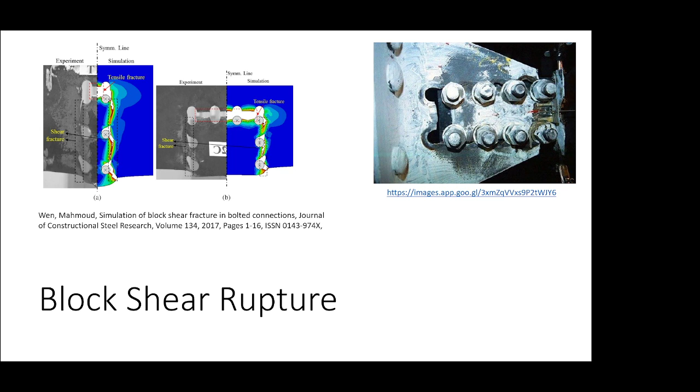What happens in block shear, and the most important thing to keep in mind, is that it's a combination of a shear failure path - one or more shear failure paths - and a tensile path. We call it block shear because what it looks like in the end is this block or wedge of steel tearing out of the member. We're going to talk about how to identify potential block shear failure paths. For this problem, I'll propose there are two failure paths, and there are reasons why you'd check one versus the other. I'll go ahead and tell you for this problem, I don't think that's the path that would govern.

Given the dimensions, although dimensions would probably affect that. And if you ever have multiple failure paths, you just use the one that has the lowest capacity.

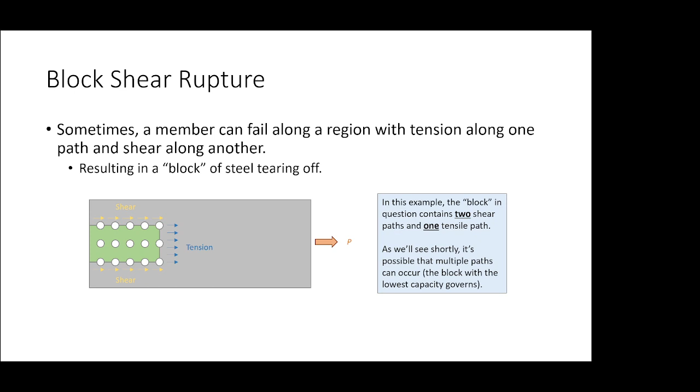All right, let's talk about the math. Now I want everybody to turn to this page in the manual because this equation looks weird. It's on 16.1-138. It's a weird equation because I want everybody to kind of see it. There are a few expressions in the spec that look like this.

So this is on page 16.1-138, and this is the expression for block shear. So the nominal capacity is determined. Am I on the right page, 16.1-138? I think you're on 16.1-38.

Did everybody see it? I think it's on the bottom, or is it on the top? No, it's on the top. It's on the top on the left side.

So first off, the expression or limit state is formatted similar to how others are formatted. We have a nominal resistance, and then we have a LRFD resistance factor and an ASD safety factor. So our LRFD phi value is 0.75. But then we got this, what's this hullabaloo going on right here?

We've got the nominal capacity equals a pile of junk less than or equal to another pile of junk. And all that is the spec's way of saying that it's the minimum of those two expressions. So whenever you see an expression like this, that's what that means. So the nominal capacity according to block shear is the minimum of the first expression or the second expression. So that's what that less than or equal sign means.

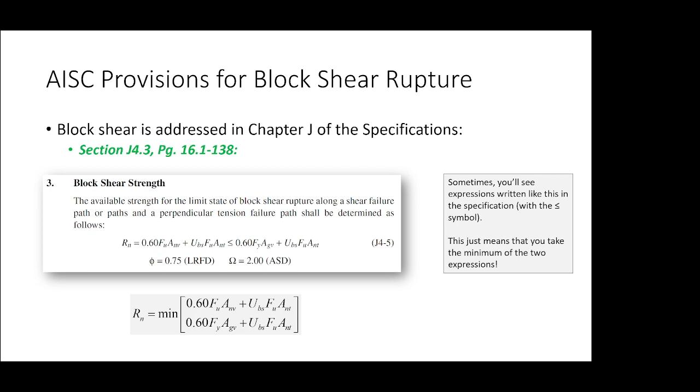So we're going to take this and simplify it quite a bit. For example, we have Rn is the minimum of a pile of junk plus this, or a pile of junk plus this. And this term is the same on both sides, so I'm actually going to pull that out. And if you look over here on the left, both of these have a 0.6.

So what I'm going to do is take this expression and simplify it to that. Basically what I'm doing is reducing the amount of repetitive calculations that I have to do. So I have Rn is UBS, FU, ANT, plus 0.6 times the minimum of those two terms.

So let's digest this a little bit. First off, let's look at that expression and see what's familiar. Fy and Fu, that should be familiar, right? Now, we haven't dealt with these, AGT, AGV, ANV, ANT expressions, etc. But we can probably guess what they are.

AGV, the gross area in shear. ANT, the net area in tension. These are just gross and net areas, okay?

Now, one thing worth mentioning is that if you look at the actual equation, you will not find an AGT term, right? There's an AGV, ANV, ANT, but no AGT. But how do you calculate a net area? What's the first thing that you need? A gross area. So we might as well list it because we're going to need it.

Now, there's this UBS term, which I'll just go ahead and tell you, for just about every case we handle in this class, UBS is 1. That's pretty easy. And then our phi value is 0.75. So honestly, this really isn't all that challenging once you've identified your path. It's just a bunch of area computations.

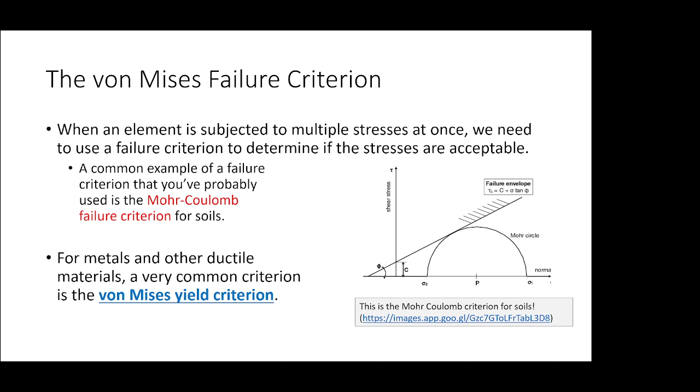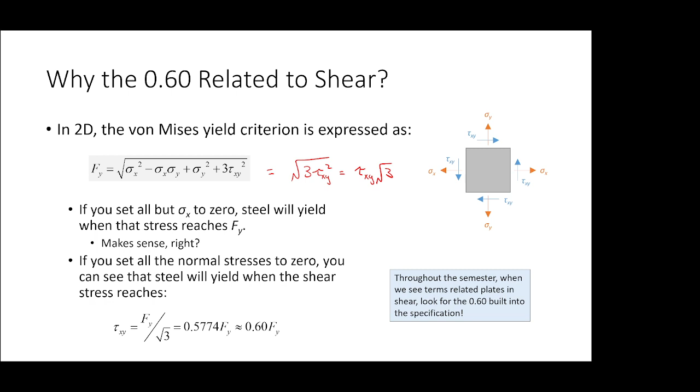This is good stuff. Any questions?

Okay, now one of the things I sort of skipped over was this term UBS. UBS is kind of like a shear lag factor for block shear. It's very empirical, and I want to talk a little bit just on the side about empirical expressions.

Empirical expressions are intended to simplify very complex behavior in the real world. The more elaborate your equation, the better your accuracy is going to be. But there is a point when the line between complexity and simplicity gets a little blurred. I mean, if we really developed some super complex expression for this, would it really affect real world designs? You know what I mean? So there's a point when we just use an empirical expression, even if it's a little inaccurate, as long as it's good enough to reflect the behavior, then we're good.

Now, the only time that UBS ever doesn't equal 1 is whenever you have what's called a coped beam. So a coped beam is when you have a floor system. Let's say you've got beams framing into beams. Let's say you have an I-beam right here, and you have another I-beam that you want to connect, but you want to connect it such that the floor system is flat. Well, what you do is you take that floor beam and cut a little bit off the ends so that the floor sits flat. Does that make sense? That process is called coping.

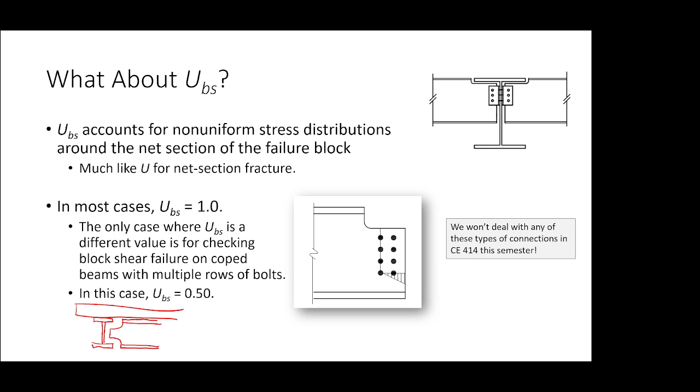Okay, let me just fix this so that I don't get that little warning. Okay, I want to talk about identifying block shear failure paths. So do you remember the lead line? Remember me talking about that? How do you define the lead line?

Everybody okay with that? So how do you identify block shear failure paths? Well, in order to identify a block shear failure path, you need to leave all the bolts intact. You need to actually separate the member from the connection, and you do need to include a path subjected to shear. So I propose that these two paths could potentially occur for block shear.

I want to look at this path over here on the left and this one on the right. Which one of these do you think would govern? This path over here on the left - is it subjected to shear or tension? Shear. This path over here, shear. And this path, tension, right? So this has two shear paths and one tensile path, right?

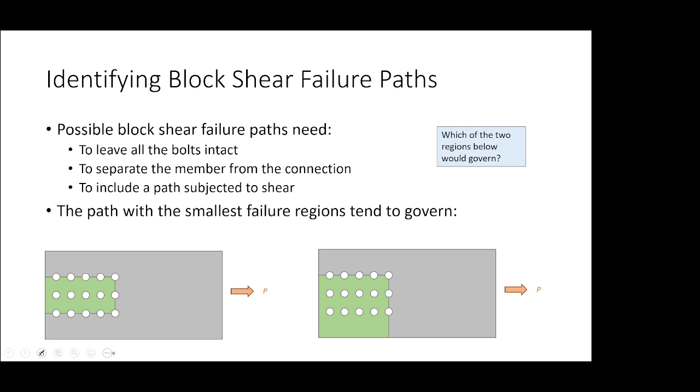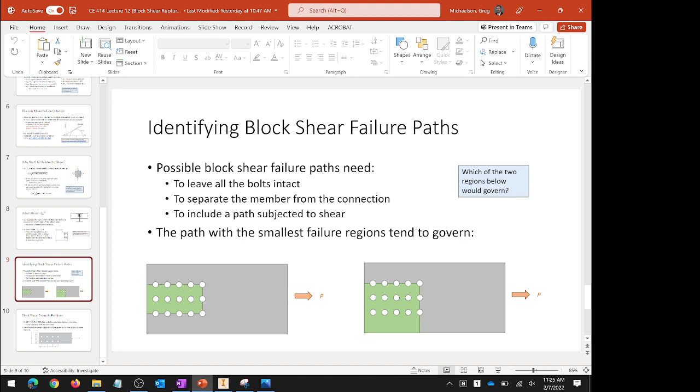All right, so this is Inventor, okay? What I did is I created a couple of connections. So here's an angle, and that angle has, you can see here, 8 bolts. I tried to draw this somewhat to scale. This has 8 bolts through one leg. And I want to sort of convince you that this is really the only failure path that you need to consider.

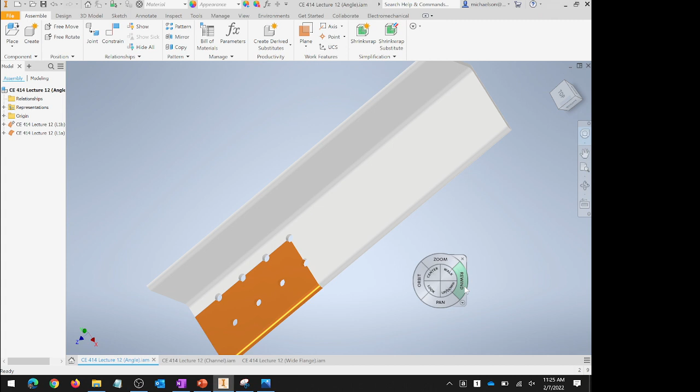For example, I would argue you do not need to consider this, because that's a lot of additional area in shear. I also would argue that you could say that the failure path goes like that, but then you would have to rip out all of that material through the angle. Does that make sense?

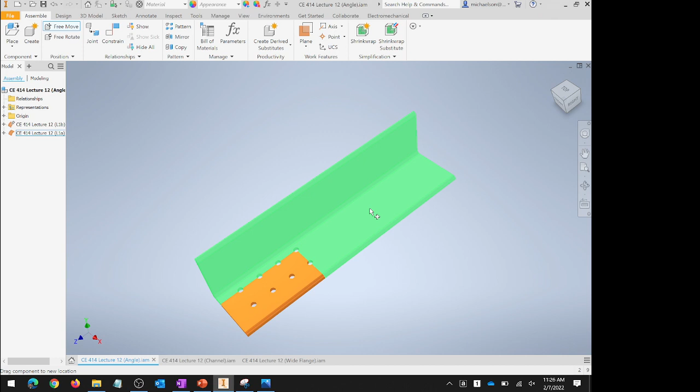I'm thinking that this is really the simplest failure path. And I think what would happen is that it would separate kind of like that. Does that make sense? So does it make sense that it's easier to fracture along this path than it is through all of that material right there? Does everybody kind of see that? Okay.

All right, so I've got - this is a good example of an angle. Here's an example of a channel.

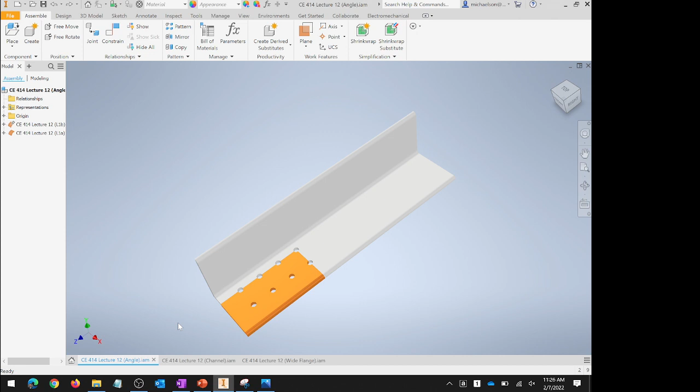So here I have a channel, and I argue that this is really the only feasible failure path, because other failure paths, like what if I just rip through all of this? But then I'd have to rip through all that material, through that little fillet and that bend. That's a lot of material to rip through, right?

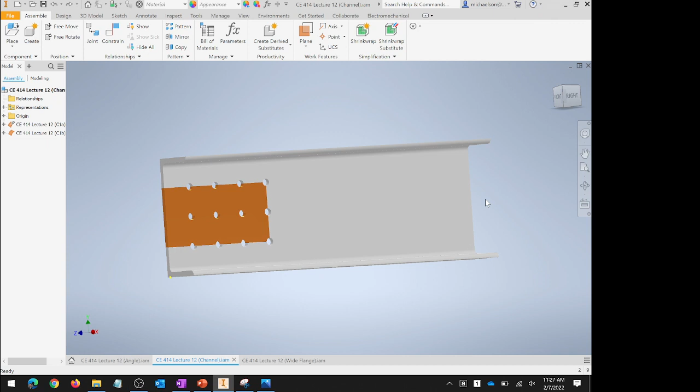So really the only failure path is this, and what will happen is... hold on... we would just rip that part out.

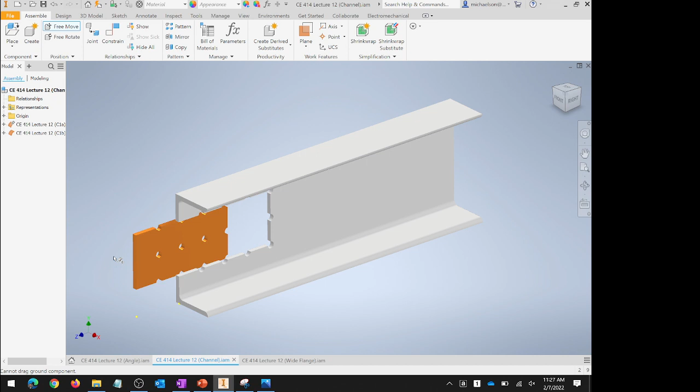Notice what's happening at the end: all of these bolts would remain intact. We're not shearing any of the bolts because the member that's ripped off—let's move that out a little further—the member that's ripped off, imagine that channel separating, it's not taking any bolts with it, right? Does that make sense? I mean, yeah, it might rip around a little, get deformed and just sort of chug out.

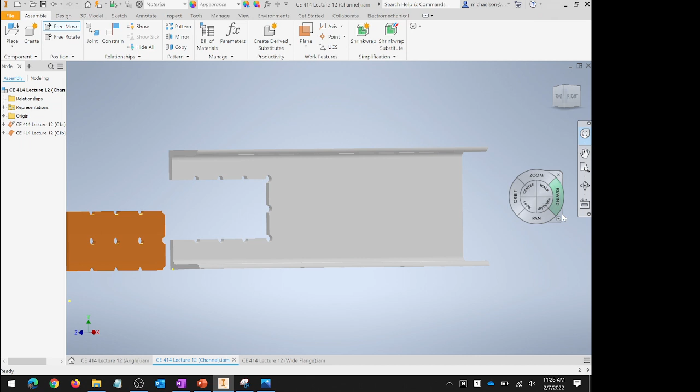Now another one that I think is a little wild is this right here. This is a wide flange, connected via the flanges. And really the only failure path that makes sense is this one right here, because any other failure path, you'd have to rip through all of this material, through the web and through the central part of the flange. That's just a lot of material to fail through, right?

But when you compute capacity, you got to be very careful, okay? The way that I compute capacity for these problems is I say, let's compute the block shear capacity of a single block, and then let's multiply it by 4. That reflects the entire capacity. So take the block shear capacity of a single block, multiply it by 4, and then don't forget your phi value—that's an easy thing to forget—phi is 0.75. Does that make sense? Any questions?

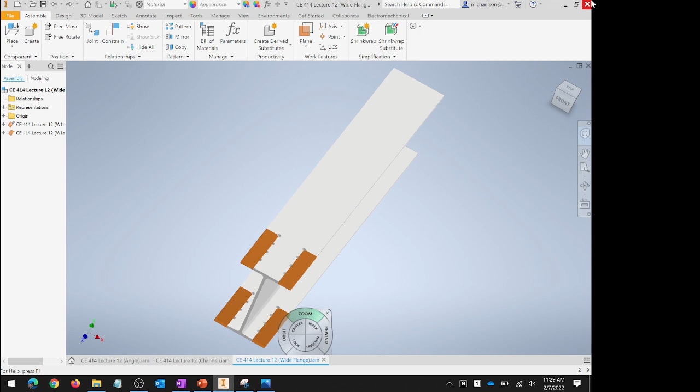Let's do a problem. So I have an angle, a 6 by 4 by 5/8 of A36 steel, and it's going to be used as a tension member. Now I really upped the bolts on this one—I used 1-inch diameter bolts, got a little nuts with them. So we're going to determine the design capacity of this member according to block shear.

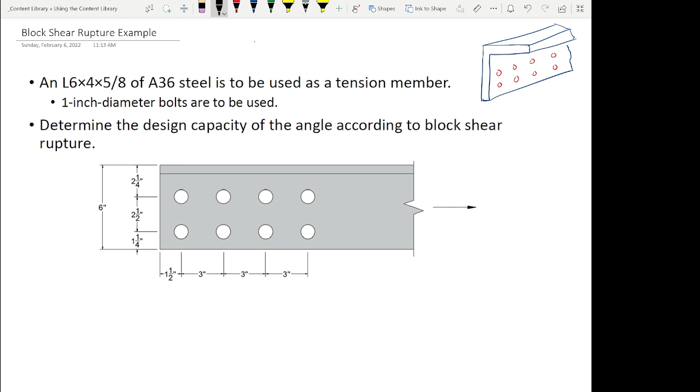Somebody tell me what Fy and Fu is for this material? Hopefully by now you're starting to remember this stuff. What's that? 50 and 65? No—A36 steel, 36 and 58. There we go, 36 and 58. He's looking to the person next to him like, you told me it was 30, 50, and 65. What's that? All right, two other things: one, we know that—okay, so bolt diameters, or no, let's call it hole diameters.

So what's the effective hole diameter? 1.125, right? Goodness, I thought I turned that down.

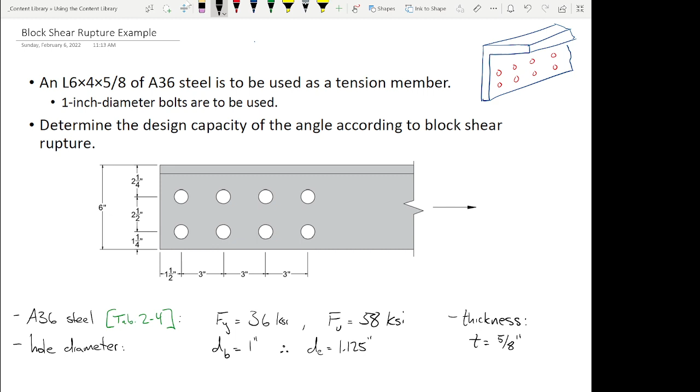All right. Now, let me close this because I didn't open it. So are we all in agreement with this, that here's the member and we're ripping through this, that this is our block path? Is everybody okay with that?

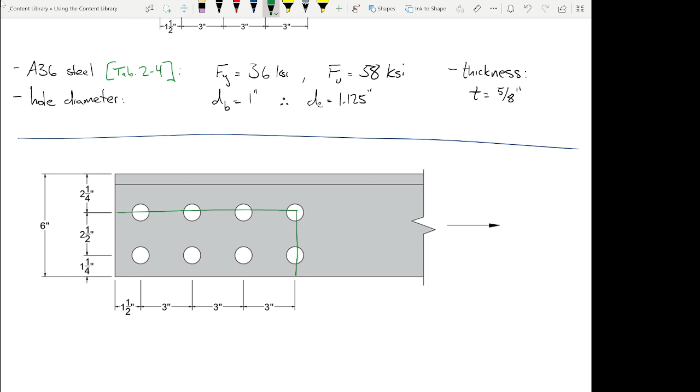Okay, so let's investigate this path a little bit. All right. This path, is it experiencing shear or tension?

Now, let's compute our 4 areas. We're going to start with the shears. So, AGV, right? We're starting with the gross area, because how do you compute net area? You first need the gross area. So I need the gross area in shear.

How long is this? 10.5 inches. Is that enough for an area? How do you compute area? Length times, huh? Well, yeah, but what is the width in this case? The thickness. And what is the thickness? 5/8. So, because here's what's going on, right?

Right? Here's the angle. And so if we're talking about this block, this is the area that we're talking about in shear, right? That little shaded path right there. And so it is the width times the thickness, right? So...

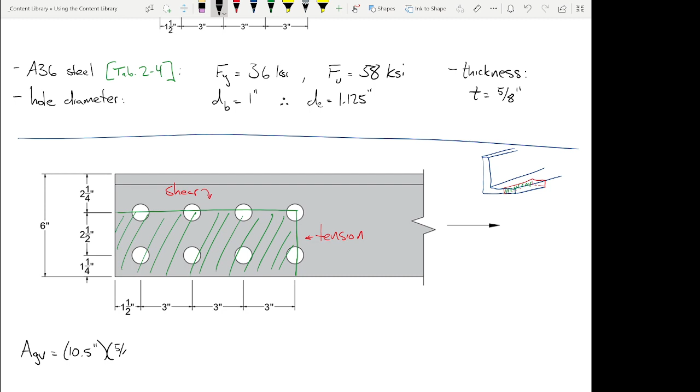Okay, is that making sense? Is everybody okay with that? If not, please tell me. What is that? 6.56 square inches. Do I have a second on that? We'll call it 6.563. Okay, now let's do the net area in shear.

Now let's just keep this simple. What's the general definition for the net area? It is the gross area minus the area lost due to the presence of bolt holes, right? So I propose that it is the gross area minus some amount of holes. We'll get to that here in a bit. But the amount of hole, or the area of a hole, is the diameter times the thickness. Is everybody okay with that?

Now, how many holes do I subtract in shear? You're saying 4. What'd you say? 3.5. Interesting, that's correct. It is 3.5.

Because look, here's the path, right? So 1, here's a hole, 2, 3. That's not a full hole right there. That is only a half a hole, right? So it's not 4, it's 3.5. This is 3.5 holes. Does that make sense?

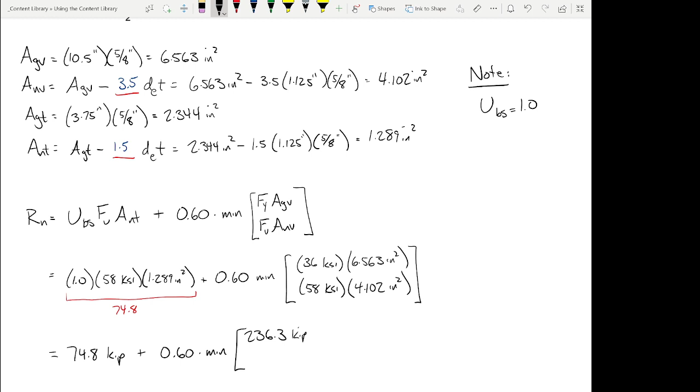And what about the second one? All right. Is that okay? So we'll say 74.8 kips plus 0.6 times the minimum of those two. The minimum of those two is that. And so what does that yield? So, 216.6.

Is that the answer? No, I forgot something. I forgot the phi value. This is Rn. So Rn, phi Rn, is throwing the 0.75 on there. So what does that yield? So we'll call it 162.4.

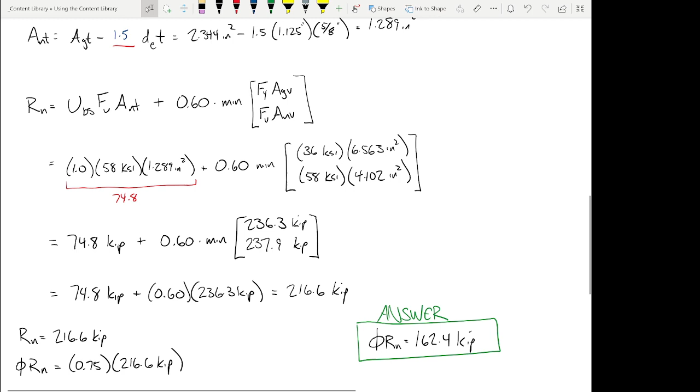Watch this. Hold on, I closed it. See, what do we have? We have an L6 by 4 by 5/8. When you chug this out, so an L6 by 4 by 5/8, you can look up the gross sectional area or the cross sectional area. 0.9 FYAG, when you chug this out, is 189.9 kips.

What does that mean? Now I didn't compute net section fracture. I could, but what does that mean? At a minimum, the block shear could govern, right? Because net section fracture might be like 150. You know what I mean? I don't know, I haven't done the math, right. But the point I'm making is that it could govern, right?

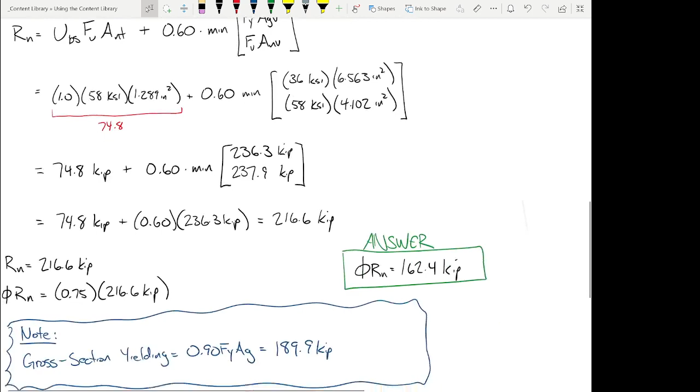It could. Now, I want to talk a little bit about design decisions, and then we're going to call it. So, do you ever need to account for block shear in the design phase? No. We have a procedure for design. We factor the loads, we determine AG design and R design. We pick a member, we check net section fracture. We check our efficiency, right?

Now we've got this block shear limit state. What do we do with it? Well, I propose it's not something we need to incorporate in our design phase. We just need, it's another check at the end. Now, what happens if block shear governs? There's a couple of things that we could do as designers. We could pick a bigger member. That might fix it.

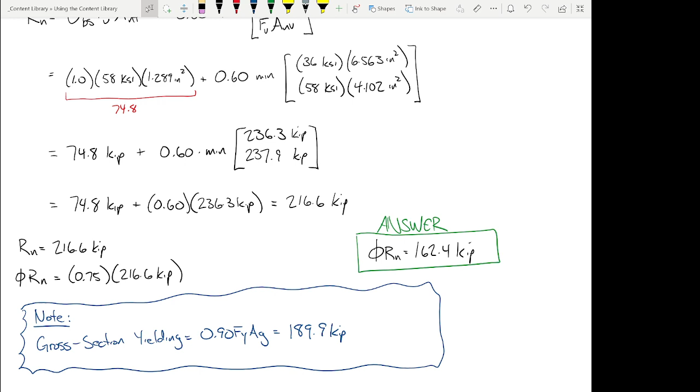That's a simple fix, right? Another fix is maybe to add another 2 bolts here at the end. Make that shear path a little longer. That's another possibility as well. But I want you to think, I just want you to keep in mind that the answer doesn't have to be pick a new member. It doesn't have to be that. You can change your connection geometry a little bit and bump up the capacity that you need. Usually, if block shear governs, it's not by a ridiculous amount, and you more often than not can tweak your connection geometry around and get it to work. Maybe you need to bump up your member size, but I think you get it.

Yes sir. Even if it does govern, what if it's like still above your PU? Yeah, that's fine. It can govern, but that doesn't mean your efficiency is over 100% either. That's a fair point. And keep in mind, there are yet even more limit states we haven't talked about. What if none of these limit states govern, and we're actually governed by whether or not the bolts snap in half? We haven't talked about that yet. We will talk about that after the first exam. So, sound good? All right.